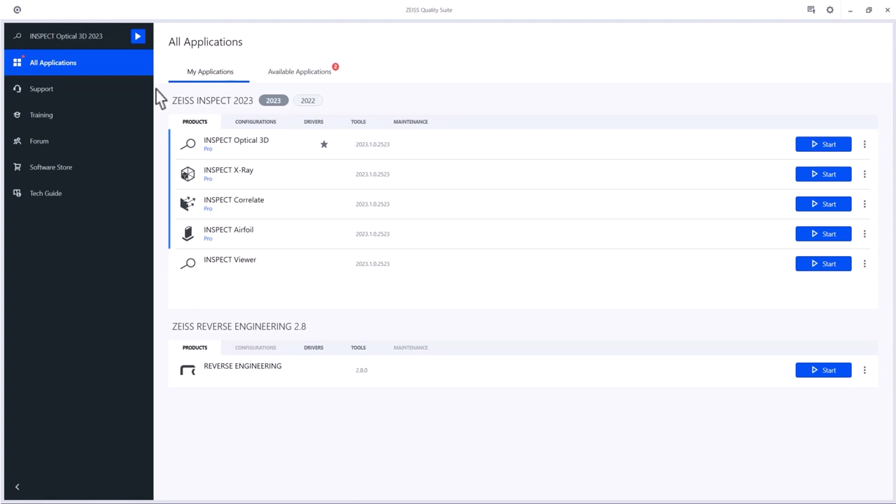And for even faster access, you can add applications to the menu bar and launch them directly.

ZEISS Inspect Optical 3D opens with the Start screen. Here, you can create a new project, open an existing project, or a recently used project. You always need a project to work with the software.

Through the Start screen, you can also access the ZEISS Quality Tech Guide and Training Center. Here, you'll find more information and trainings for your software and hardware products. But back to the Start screen.

If you want to play around with the software but have no data available, you can download sample data. The software redirects you to the ZEISS Quality Suite, where you can download free example projects.

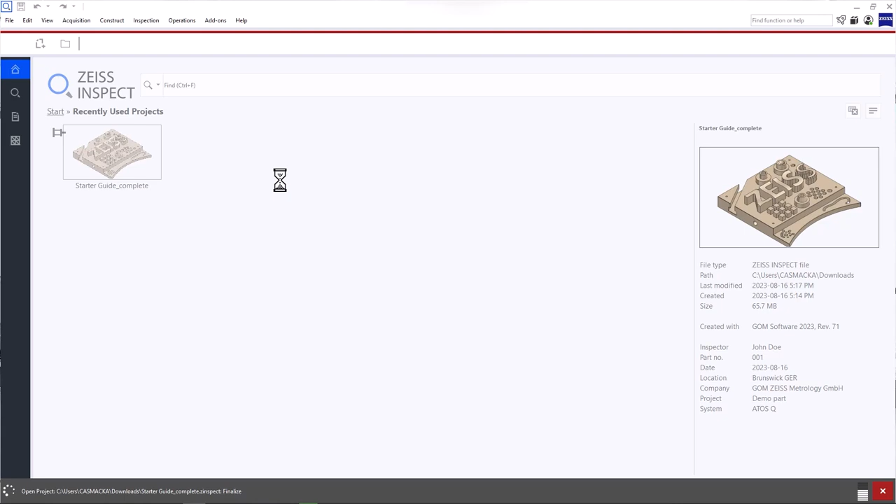I'll open a recently used project to explain the user interface. Let's start with the 3D view, which is right in the center. The 3D view is your main work area. It's where the data is displayed.

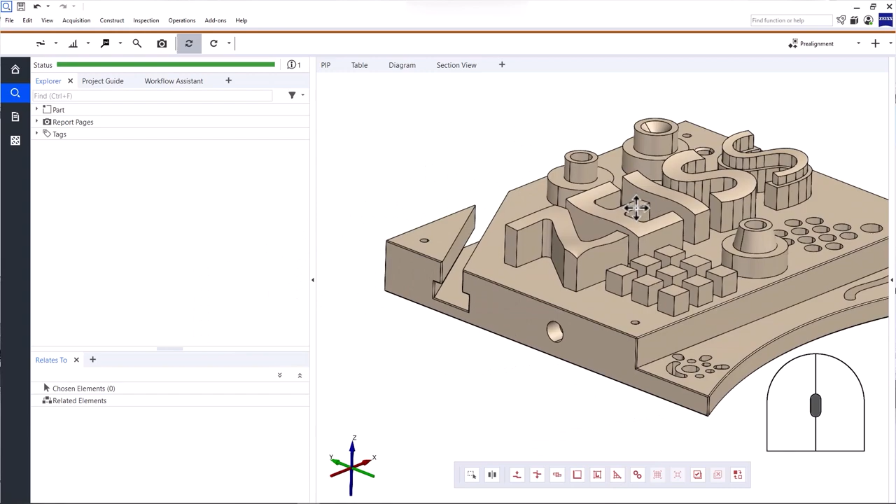You can turn the object with the left mouse button, zoom in and out with the mouse wheel, and pan the object by pressing the mouse wheel. To rotate the object to the left or right, press Shift and the left mouse button.

You can also click the cube in the left corner to display a standard or isometric view.

Now let's move on to workspaces and the main toolbar. On the left side, you find the different workspaces. Workspaces are dedicated to assignments such as inspection, reporting, and mesh editing.

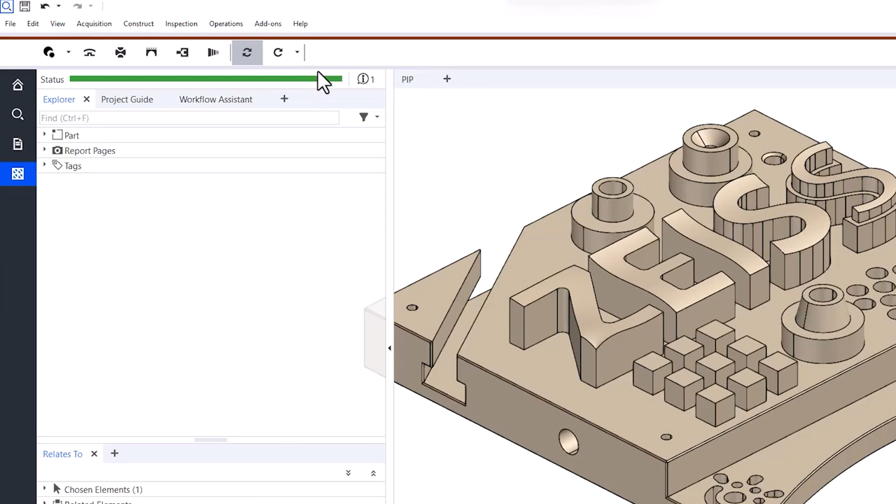If you switch between workspaces, the main toolbar changes to provide the tools you need for your tasks in the specific workspace. It's designed to guide you through the main steps in each workspace. Start brings you back to the Start screen.

The Explorer contains a tree of all elements in your project, whether they have been imported or created during your inspection. The elements are divided into different categories, such as part, which can have a name, like in this case, and report pages, for example.

The category part is essential and contains all the elements for the analysis of a part. That means nominal and actual data, as well as inspection elements, and so on. Everything is well organized and easy to find.

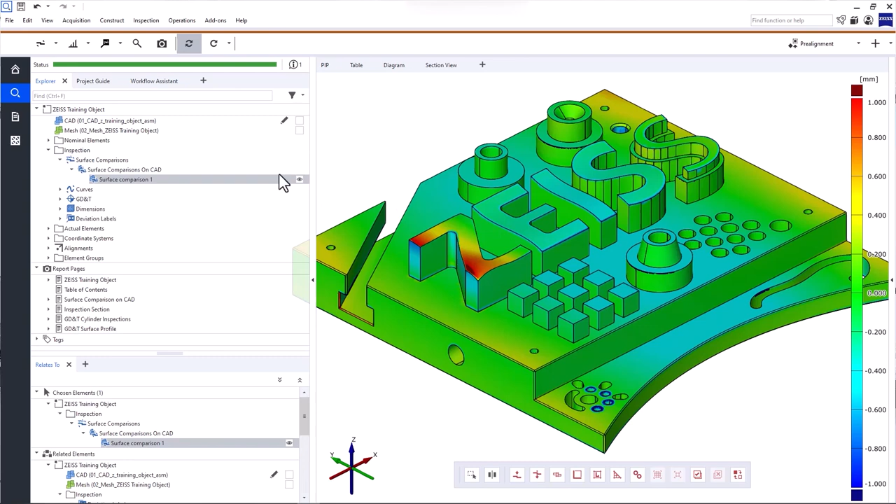If you want to display elements in the 3D view, just drag and drop them into the 3D view with the left mouse button. When you do that, the elements will be displayed exclusively. You can also select them in the Explorer and use the keyboard shortcut E.

If you want to display an element in addition to the content in the 3D view, toggle the visibility here or use the keyboard shortcut V.

Now before we continue, let's talk about customizing the user interface. In ZEISS Inspect Optical 3D, you can display the information you need exactly where you want it.

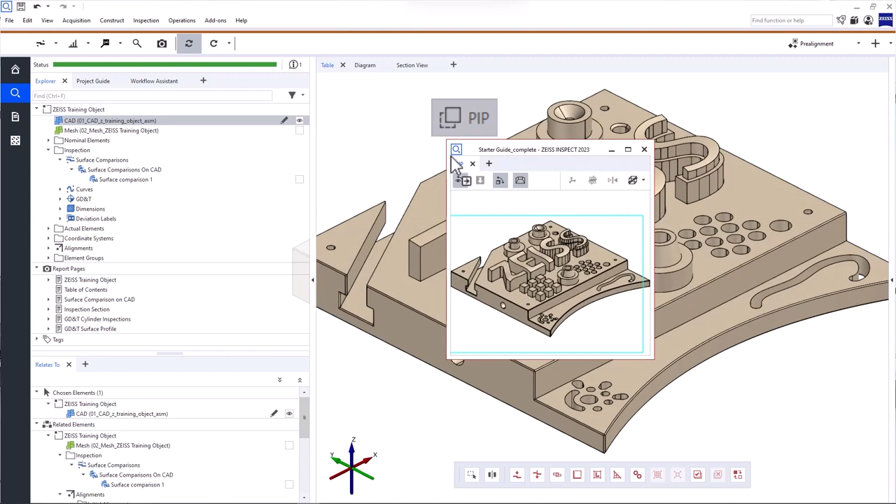All you need to do is drag and drop the different windows into the respective docking areas on the left, the right, or the top. And the software even supports multiple monitors. To add a window, click the plus.

To reset the layout to the default, click View, Screen Setup, Reset all workspaces.

Underneath the main toolbar, you'll find the status bar. The colors provide information about your project and let you know if there's anything you need to address.

For more details, look at the project guide. Here, you'll find a comprehensive list of all hints and warnings divided into different categories. This list is designed to guide you through the troubleshooting process and suggests possible actions.

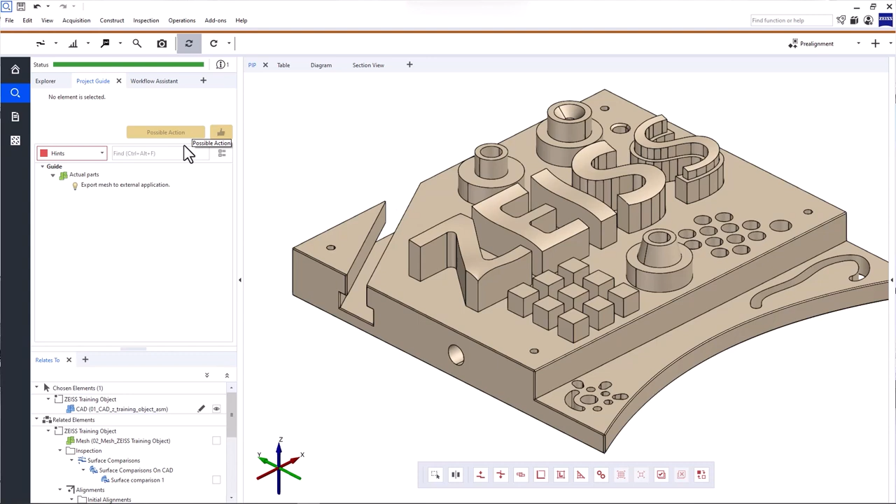To evaluate your part in ZEISS Inspect Optical 3D, you need an alignment. A project can contain several alignments, and you can switch between them at any time.

When you switch to another alignment, the software automatically recalculates all the elements because an alignment change affects the inspections in the project. You can also create a new alignment at any point in time.

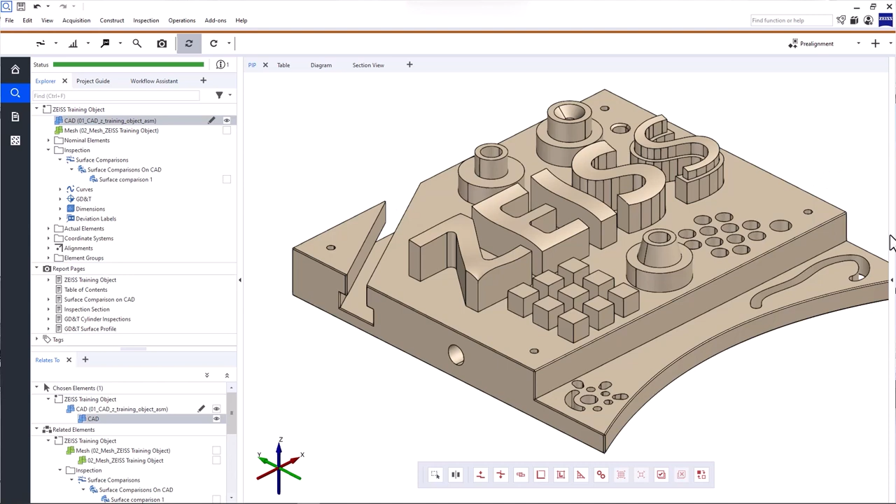Now, if you want to view or change the properties of an element in your project, open the Properties window on the right. You can also use the Tab key to open it. The content of the Properties window depends on the element you selected in the Explorer or the 3D view.

For the mesh, for example, you can display the mesh structure or adjust the transparency.

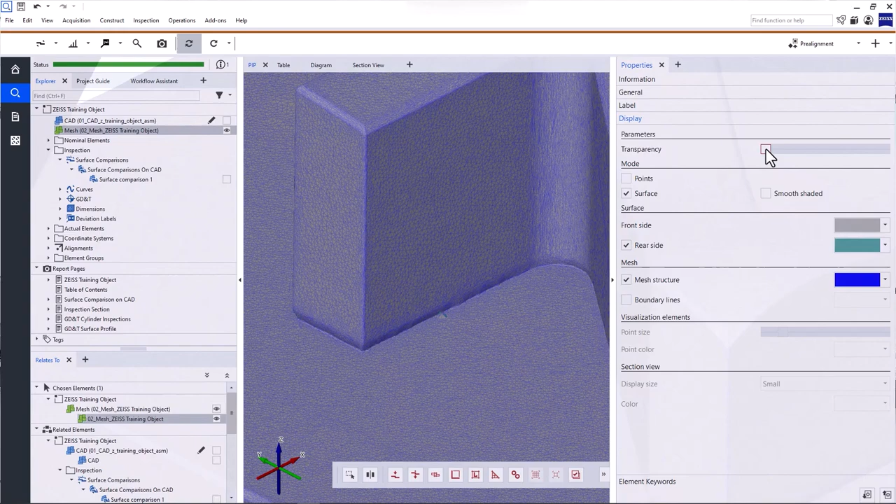Next, we'll look at the toolbar. It contains various selection commands. To find more selection commands, open Edit Selection in 3D.

You can add these selection commands and any other function to the toolbar by using drag and drop. You can also reorganize the tools in the toolbar and delete them.

Alternatively, you can access the most important selection commands by clicking the right mouse button on the background in the 3D view.

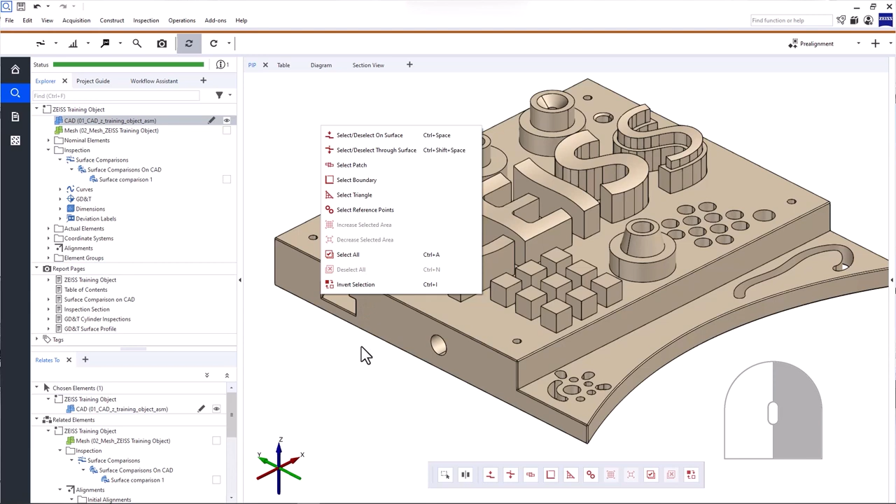If you're looking for a software function or more information, use the search function here. The results are divided into functions and help. When you click on a function, the function dialog opens and you can proceed to use the function.

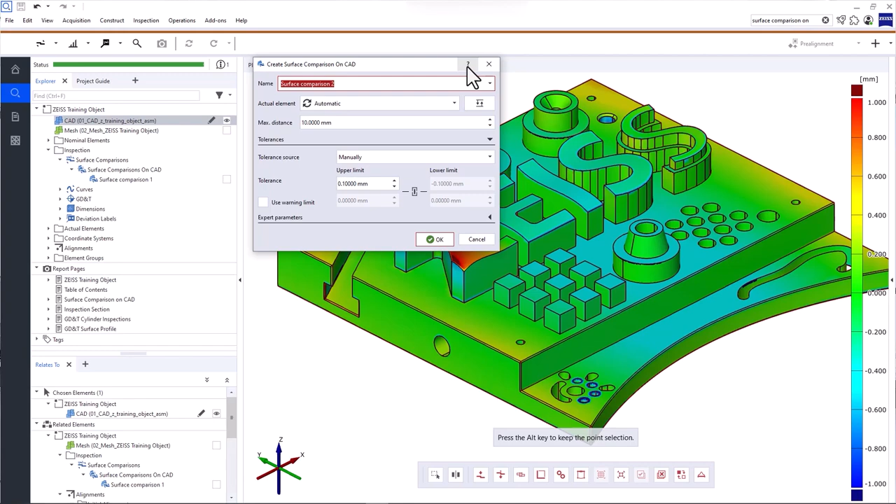If you click on an entry under Help, the ZEISS Quality Tech Guide opens in the ZEISS Quality Suite. You can also open the Tech Guide from any dialog window by clicking the question mark. In the Tech Guide, you'll find information about workflows, software functionalities, and parameters.

That's it for this short introduction to the user interface. To start working with the software, take a look at the video How to Import Data with ZEISS Inspect Optical 3D.